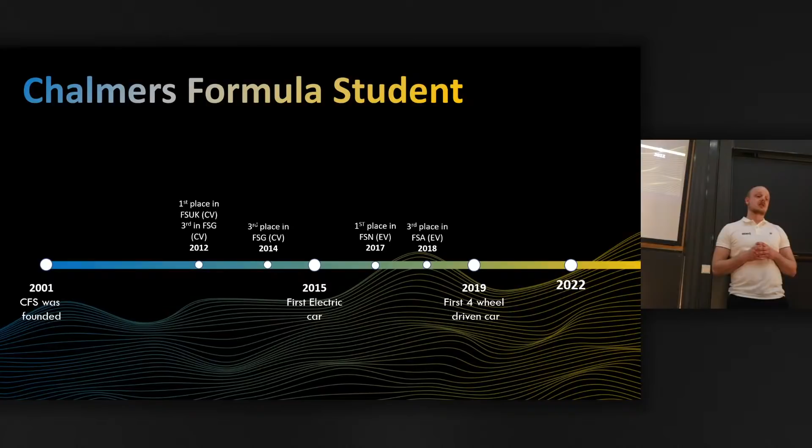So it all started back in 2001 when CFS was founded. And back then we were using a combustion car engine. So it was two-wheel drive. And we had some good success with it in 2012 and 2014. And eventually we went with electric. We started off with a two-wheel drive car there as well. And we had some great results there as well. And eventually in 2019, we went with a four-wheel drive system.

And then what's new this year for 2022 is that we're going driverless. So this year we're gonna have a car that can drive both with a driver in it, but it's also gonna be able to drive driverless. And with this comes a number of new technical challenges, and that's what we're gonna dive deeper into later on.

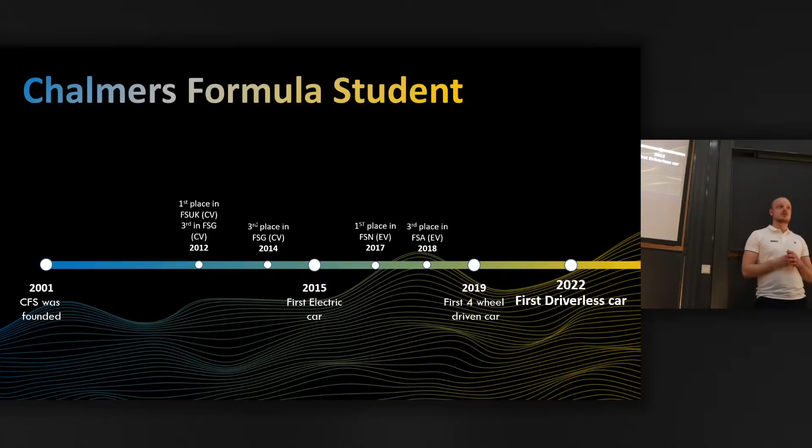So who is building this car? It's us, Chalmers Formula Student. We're a team of 43 project engineers that do this full time. We have 19 trainees helping out, and we have about 8 managers making sure we're doing what we should. And we come from a lot of different areas of study, over 15 to be specific. And we are a very international team. We have over 10 different nationalities in the entire team.

And I'm very happy to announce that we will go to 2 different competitions this summer. Formula Student Austria, where we're going to be driving a manual car. And we're going to be driving at the famous F1 Red Bull Ring track. And then we're also going to Formula Student East, which is in Hungary, where we're going to be running the car 100% driverless.

And then, as I mentioned earlier, for the Complete Engineering Challenge, these are the events we're going to be competing in. So first, for the static event, I told you we have to sell the car. So we have to pitch a business plan idea for a few referees or judges, where we have to show that we can pitch a good idea and sell it.

We also have the cost and manufacturing event, and this shows that the team is good at making up the budget and economy of the car. We have to show that every piece of the car is written down, and every process that goes into making the car is also written down. You can't build a car if you don't have the economy for it. So we have to show that we are able to do that.

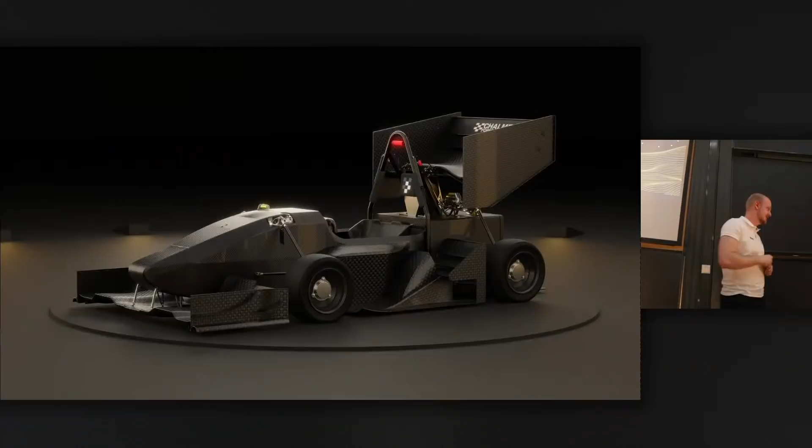And to start off, we're going to start off big by showing the 22 car. Some technical highlights of the car include 97% of what you see here is designed by us and manufactured by us. In each wheel assembly here, you can see there sits one outboard motor giving us 4-wheel drive, and all of these are hand wound.

And apart from milling of the molds, the entire monocoque is a long process that basically we make it ourselves, just like everything else. Here in the rear compartment, you can find the battery and the electric powertrain. And outside here, you can also see the aerodynamic package. Every part of this car is optimized to reduce weight and inertia, allowing us to accelerate and turn quicker and eventually reduce our lap times.

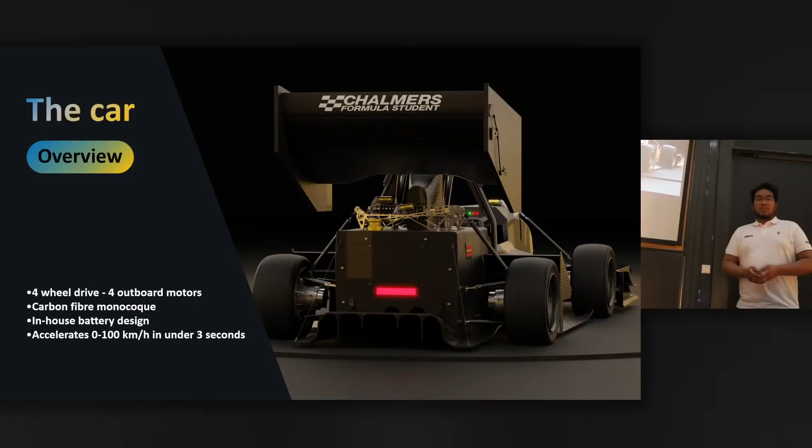As for our acceleration, from 0 to 100 we can achieve that in 2.5 seconds. To dive deeper into the specific subsystems, we will begin with aerodynamics, where I will hand over to Linnéus. Thank you, Jacob. Yeah, let's talk aerodynamics. Why do you need aerodynamics? Well, aerodynamics gives you downforce, and downforce gives you increased grip, and increased grip gives you more cornering speed, and that reduces lap time, and you get more points on competition.

So, this year's aerodynamics package was an uphill battle, because we had to add a lot of new components to compensate for the driverless system. So we added an additional computer, a LiDAR, and a camera, and a lot of other stuff. So we started off with a really low downforce level, but we're really proud to say that we increased that level from the start of the design period by 22% to the end of the design period.

And we did that by changing our parts, of course, but also taking into account the new parts and giving them casings for like the driverless computer or the LiDAR. And that gives us an aerodynamic package that makes it so the car can be driven upside down, theoretically, at 120 kilometers an hour. We will not perform this stunt, but that's just a fun fact.

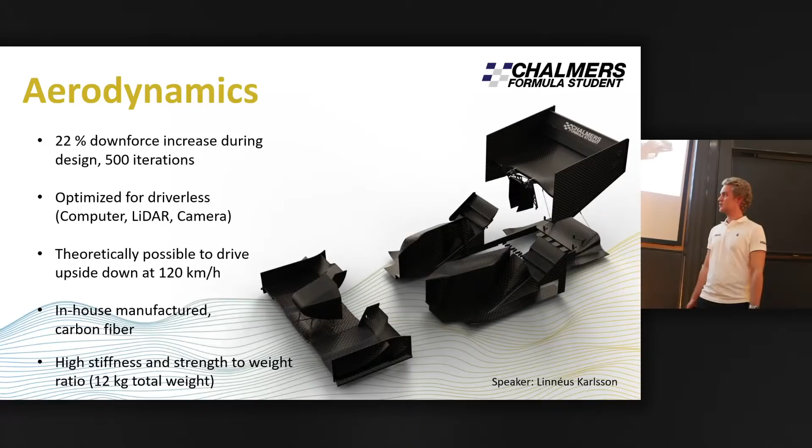And lastly, the aero package will be manufactured with carbon fiber, and this is because carbon fiber gives you a high stiffness and strength to weight ratio. So our aero package will be very light at approximately 12 kilograms. Yeah, and Daniel will take you through more on the parts.

Yes, let's talk more about the specific components of the package. First off, we have the front wing. This is the single largest contributor of downforce on the car at about 35%. We're very proud this year to have improved the braking performance of the aerodynamic package, that is the downforce produced, by 25% compared to previous years. The front wing is mounted to the monocoque using the brackets you can see here. These are topology optimized to reduce the weight, but still keep all the strength.

New for this year is that we have a drag reduction system on the front wing. This means that the flaps on the front wing can open up on the straights to reduce the drag and therefore increase the speed and efficiency. We also have a rear wing. This is optimized for the maximum downforce at around 25% of the total produced. This wing also has topology optimized brackets and a very strong DRS system that reduces the total drag of the car by 40%.

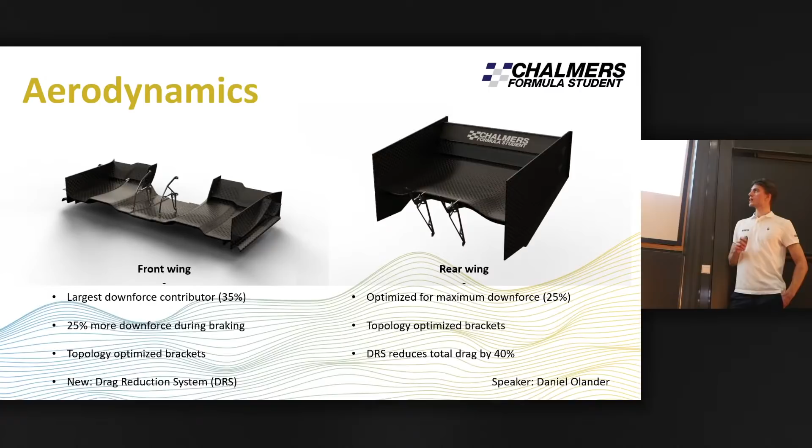On the sides of the car, we have the side structures. These are mounted on the side of the cockpit, beside the driver. This is a component that has been producing more and more downforce each year, and it's now up to 25% of the total.

New for this year is that we have an integrated cooling package, which means that the fans and radiators are mounted so that suction is increased underneath the car, producing more downforce, and also the fans are mounted in a way such that airflow is directed to the rear wing, increasing the downforce of the rear wing even more. We also have side covers that house the driverless computer on the side of the car. Lastly, we also have the rear diffuser.

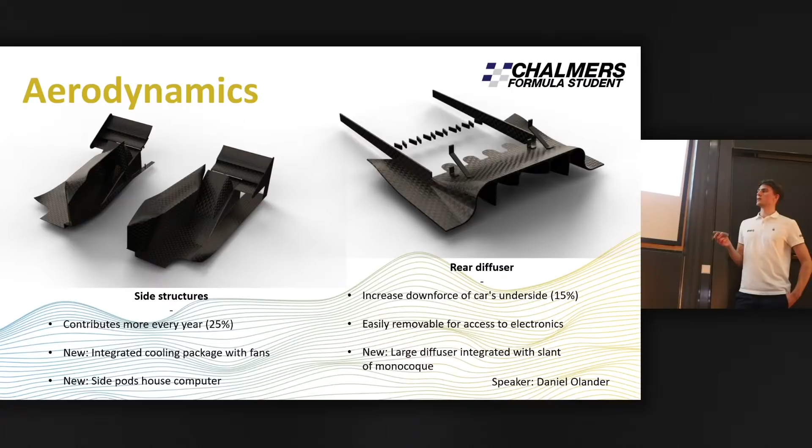The rear diffuser increases the downforce of the car's underside, the whole chassis of the car, and increases around 15% of total downforce. This is designed to be easily removable, to give easy access to the electronics in the rear of the car. New for this year is that it's larger than ever before, due to it being integrated with the monocoque that has a slant at the rear. Gabriel will now talk more about this monocoque.

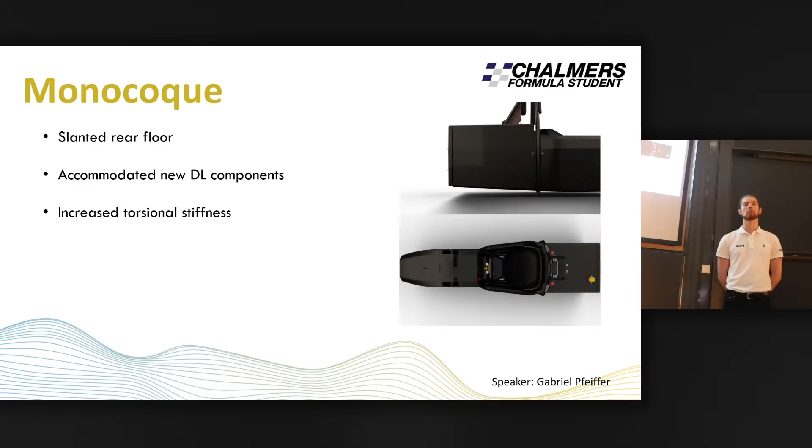Another important part for the chassis group is to do a lot of material testing. Since we are putting a driver in this that is going to be racing at high speeds around tracks, we need to make sure that the car is safe in case of a collision. For this, we do a lot of material tests, both for layups and in the case of crashes. We also want to optimize this so that the chassis weighs as little as possible while still keeping the driver safe. Now to present more about the moving parts of the vehicle, Herman is going to take over.

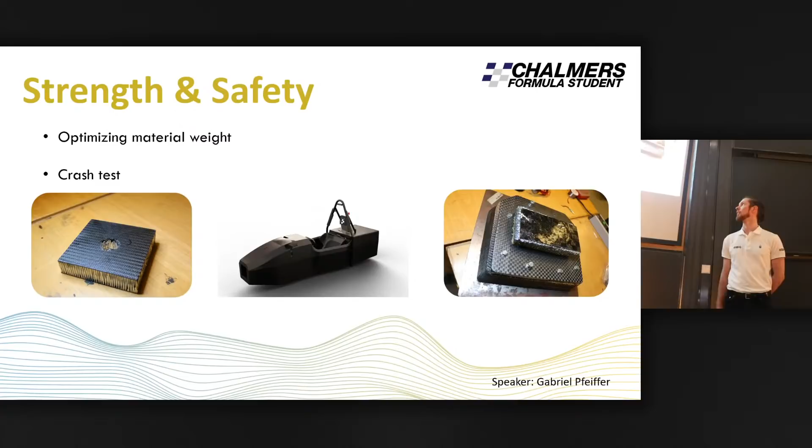Yeah, so I represent the wheel assembly group, and our mission is to get the power from the motor to the ground. To do this, we have this wheel assembly here. The biggest change this year was the fact that we moved from an 18-inch tire to a 16-inch tire. This was mostly done to reduce the rotating weight as well as inertia of the whole assembly. Together with other weight reduction things we did, we managed to reduce the mass of the system by 4.8 kilograms, as well as reduce the rotational mass by over 800 grams per wheel. This is of course very important to improve the handling of the car, as well as the responsiveness during acceleration.

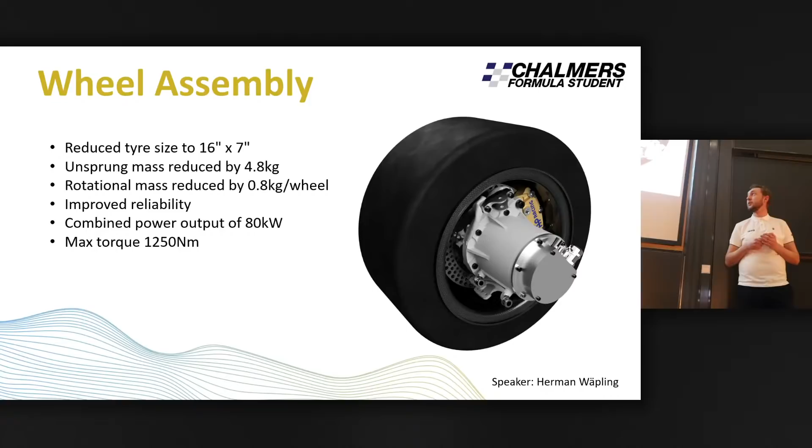Other than that, we try to make the system more reliable by reducing the amount of parts, and we also tried to get common parts so we could have interchangeable spares for the front and rear axle. As Andreas mentioned in the beginning, we have a four-wheel drive system on the car. So we are not only using motors to propel the car forward, we can also use the motors as generators during braking to recoup some of the power that would otherwise be lost into heat during braking. The maximum combined power of our tractive system is 80 kilowatts, and that is due to regulations. And our system produces a maximum torque of 1250 Newton meters.

To dive a bit deeper into the system itself, we have our homemade carbon fiber rims. One of the biggest reasons to use carbon fiber rims is of course to save weight. But we are also very free in the whole packaging design when we do them in-house, because we can change the offset and the bolt pattern of the rims very easily, thereby making a more well packaged system. Then we have our gearboxes. They are here, and they are single speed reduction gearboxes. It takes the approximately 20,000 RPM maximum from the electric motor and transforms it down to a more usable rev range, increasing the torque as well.

We have the floating disc brake assembly, which of course is used to stop the vehicle. We have 4 piston brake calipers in front and 2 pistons in the rear. The reason for using floating discs is of course that they won't warp when they get hot. Then we have our uprights. They are used to connect the suspension linkages to the assembly. They are designed by utilizing topology optimization to try to get as stiff and lightweight a component as possible. They are 3D printed using metal 3D printers, so they are printed in aluminium.

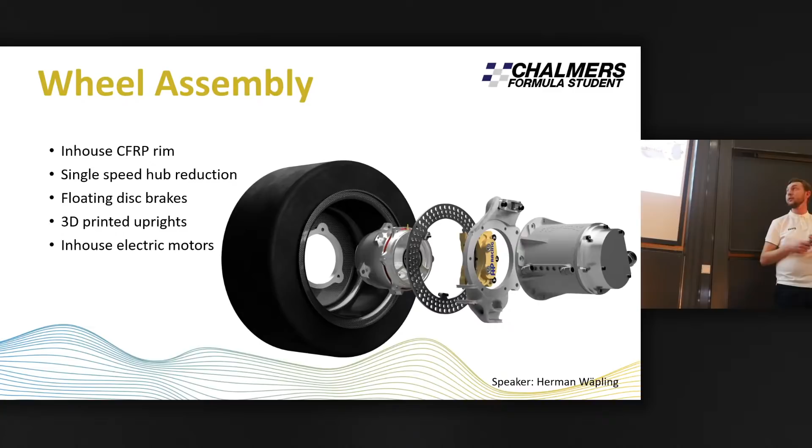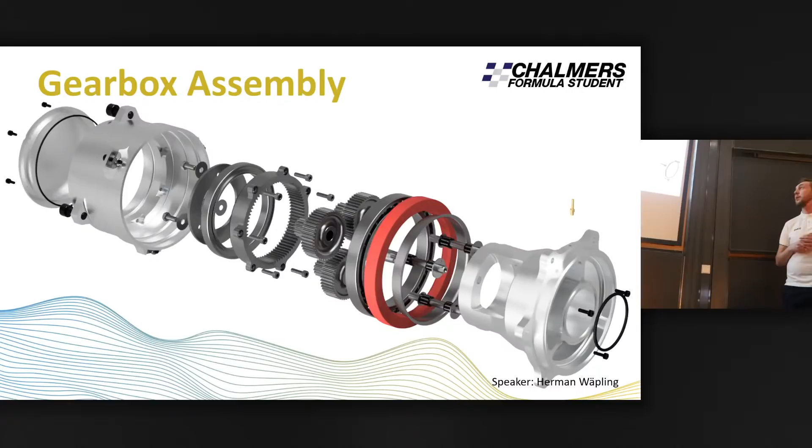Lastly, we will look a bit into the gearbox itself. It's a planetary gearbox. It's a 1.5 stage gearbox, so it takes the power from the motor in here. Then we have the planetary gear set, and then the ring gear. The ring gear is mounted to the gearbox housing, which then spins the wheel itself, so it's bolted here. It also holds the disc brake in place. And that's basically our system.

So now Suyash will talk a bit more about the suspension system. So we as a suspension group are responsible for all the vehicle dynamics of the car, the actuation system, and the kinematic linkages. And the basis of the vehicle dynamics is the suspension subsystem on the car. As we know, suspension is responsible for isolating the body from the road inputs and reacting to the forces generated at the tire contact patch. And that's where the actuation system will come into the picture.

So this year we have a very specific system on our car named HeRo Suspension, where HeRo stands for heave and roll. The important feature of this system is it is decoupled. Now what do I mean by decoupled? On production cars, we have one spring and one damper on each wheel, and an anti-roll bar is used to stiffen it up. But for us, the heave motion and the roll motion are basically divided into different springs and dampers.

This is all good, but it presents some challenges. This is a very neat and special design, but the challenge with it is setting it up and tuning it so that it becomes a competitive solution for us. But the advantages of using this system outweigh the challenges. The key advantage of using this system is the ability to tune the car with a stiffer spring in the heave motion and softer in the roll motion, along with independent damping coefficients, so that we can improve the tire grip during cornering and hence the handling of the car.

The biggest update this year in the actuation system is the dampers. We are moving towards shorter dampers. What this allows us is to make the system more compact, and hence we can reduce some weight in it, which is one of the goals for CFS22. Another specific part that we have focused more on is rocker bars, which transmit the load from the tire and pushrod to the springs and dampers. And this part requires additive manufacturing. Basically, they are going to be manufactured in 3D printable aluminum alloy.

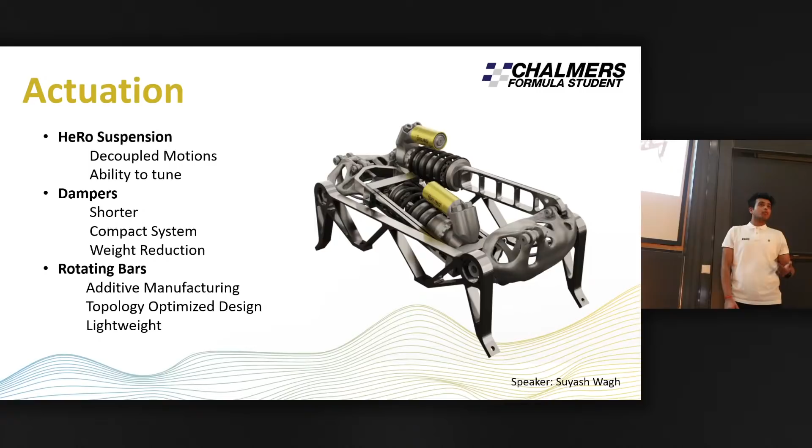Another crucial system in suspension design is to achieve the all-important ride and handling balance. Vehicle dynamics is used in conjunction with the kinematics to study the behavior of the vehicle during different dynamic conditions. As Herman mentioned, we are moving to 16-inch tires from 18-inch. So to compensate for that change, considering the packaging constraints and the targets set by us for different dynamic parameters, we have to change our mounting points on the chassis, keeping the same ground clearance and the same ride height. So basically we simulated how the linkages will travel during different dynamic conditions, and that way we came up with how we are going to mount these linkages on the chassis so that we get better handling of the car, which is important for every vehicle.

Our focus from now on is to build the compliance model. The basic idea here is to study the deflection of the suspension parts per unit force applied. Currently we are only using rigid components while doing the simulation, but as we move forward, we are going to consider elastic components such as suspension bushings, so that our model can become more accurate.

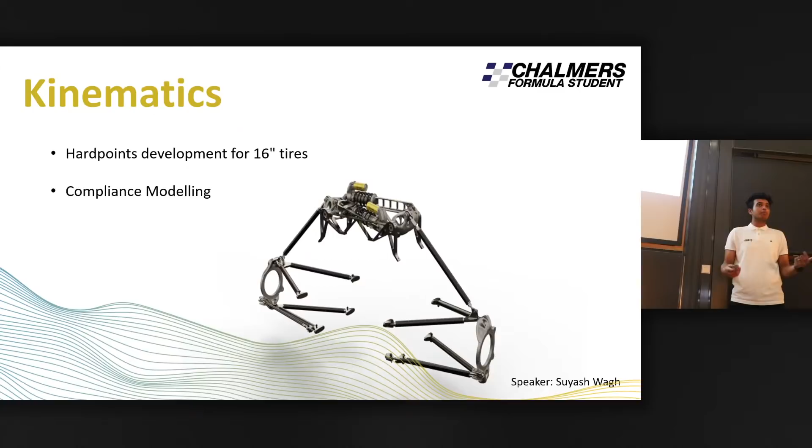We get more realistic data to validate our design. At last, I would like to show you some of the simulation videos that we actually perform. So this is one of the different simulations that we perform to actually check the behavior of the car during different dynamic conditions. So as you can see, both tires are moving in the same direction, so we call it parallel wheel travel, and here they are moving opposite, so we call it opposite wheel travel.

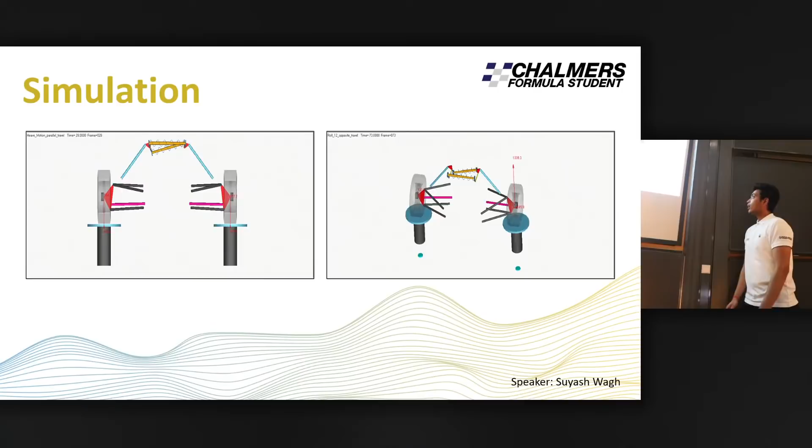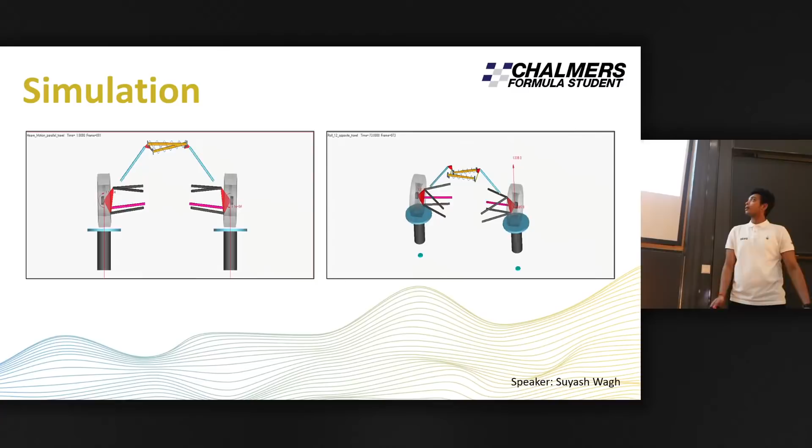And this type of simulation is used to check the behavior of the car whenever there is a bump or a droop on the road. And like this, we perform different simulations to check the behavior of the car in different dynamic conditions. To talk more about braking and steering, I will hand over to Maja.

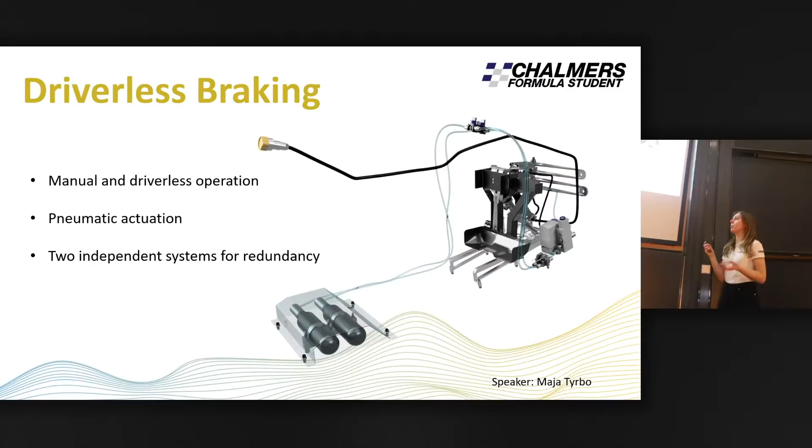And then we go down to pneumatic pistons here. If we look closer at the pneumatic pistons, we can see that they are directly connected to the brake pedal. So when the cylinder gets air, it pulls the pedal in the exact same way as if the driver were to push the pedal. So the system is basically acting as a driver.

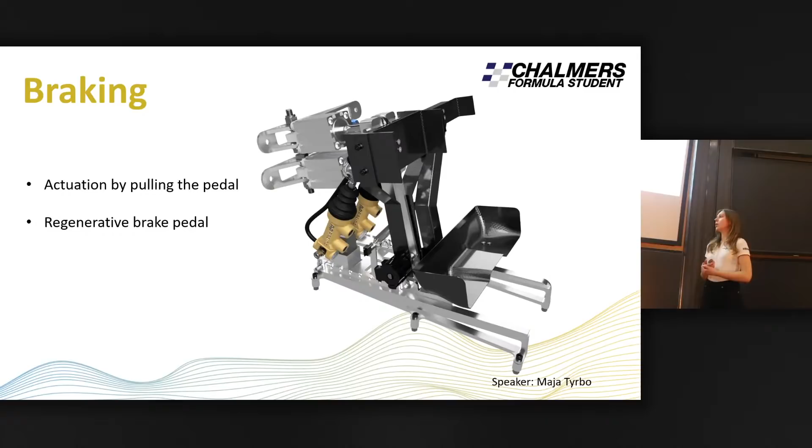And then for manual braking, we have also added a brake pedal for regenerative braking that Herman told you about. This pedal is situated here outside of the normal brake pedal, which is the aluminum part in the middle. With this it is possible to measure the travel of the driver's foot, so we know when to apply the regenerative braking, and in that way we can use less energy while still going the same distance, which means we can downsize the battery and score more points in endurance competitions.

And then for steering, it's the same as with the brake system. We need to do it both manually and driverless. So we have a normal steering wheel like other cars. And then for the driverless part, we have a servo steering motor situated here. The motor is directly connected to the steering rack, so when the motor spins, the steering rack will move back and forth, which will steer the wheels that are situated here.

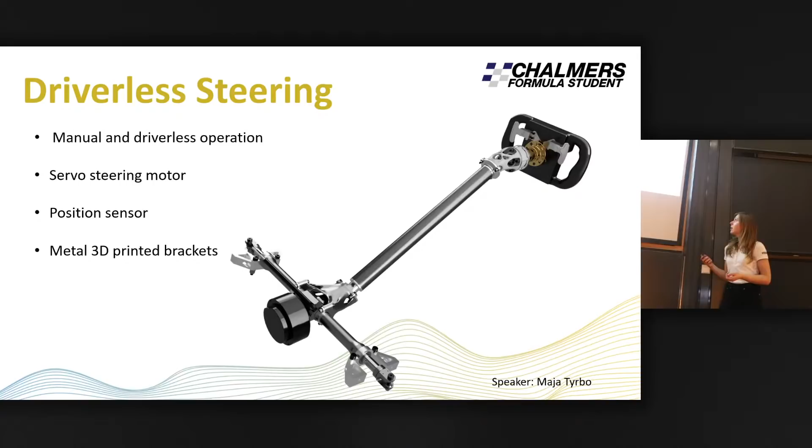We're using a position sensor, so we know the angle of the wheels, so that we always know when to steer and how much to steer, depending on where we are on the track. And then to hold it together, we are using these metal 3D printed brackets where we use the topology optimization that both Suyash and Herman have told you about. So with that, I will hand over to the powertrain and Vishal.

As discussed earlier, we have a lot of additional components due to the driverless integration. We have spent considerable effort in packaging the components inside the monocoque. The considerations were made with several factors, but a few of them are bringing the total weight distribution as central and as low as possible. The battery box is the heaviest component in the car. This year, the accumulator enclosure has been made lighter by incorporating more lightweight aramid material in the design.

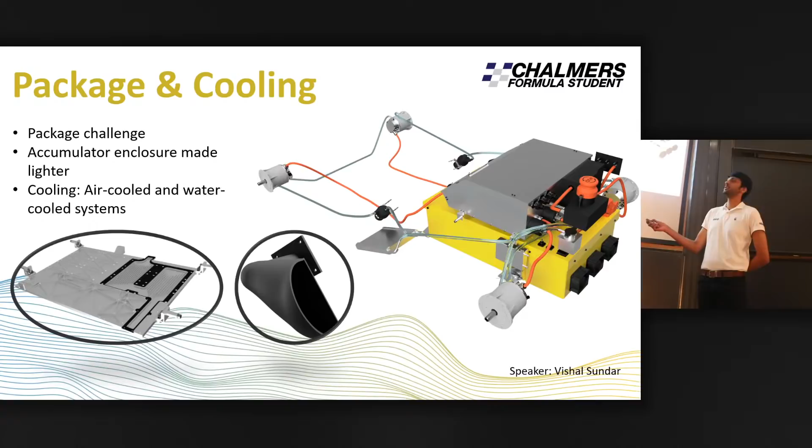The cooling of the powertrain unit is done by two systems, the air-cooled and the water-cooled system. The motors and the PE box are water-cooled, while the accumulator box is air-cooled. Some key designs to note here are the cooling plate for the PE box, which is 3D printed to make the intricate cooling channels, and the air intake manifold. We have accommodations for actuators this year, that's braking and steering actuation, control and implementation.

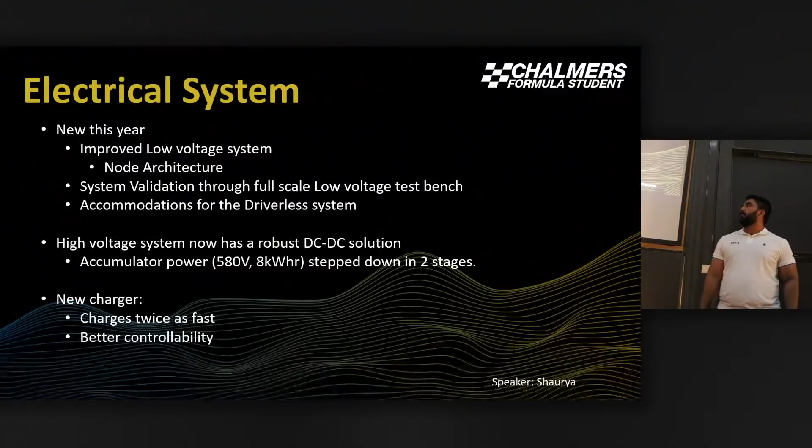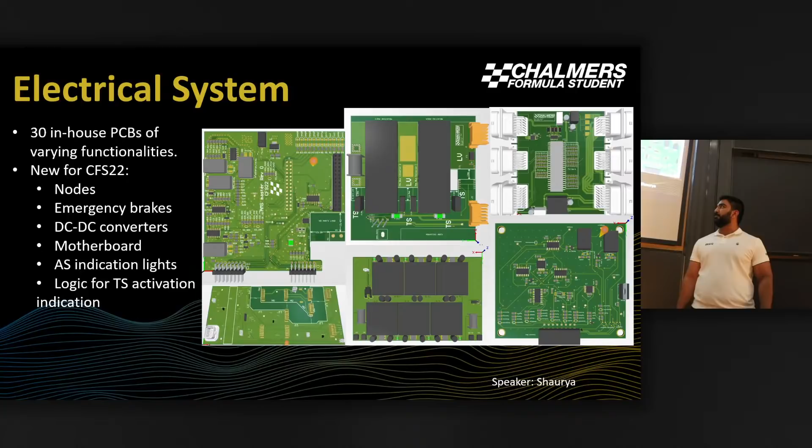For high voltage, we have a robust DC-DC solution. It is divided into two stages. It also has soft start on input and output. It comes with temperature and current sensors and also has double the power output from the previous year. We also have a new charger this year that charges twice as fast and has better controllability. We have 30 in-house PCBs running from rear to the front end, covering everything and making everything happen. For this year, we have nodes, brakes, DC-DC converters, motherboard, indication lights for logic and autonomous system. I'll hand over to Jonas for nodes.

So the node system, the communication system, it's a bit difficult to visualize, but you can think of it essentially as the nervous system of the car, which means that it needs to be very quick and it needs to be 100% reliable. Sending the wrong signal at the wrong time could essentially mean the difference between the car taking the turn optimally or spinning off the track. And this has to be done for over 100 different sensors, and those sensors have to be available to all devices on the car. So it's quite a difficult situation, and we have to solve that somehow.

The way we've done it this year is that we have 6 different nodes, as you can see here, and they're all communicating over a CAN network, which means that the node that wants the information can take the information and ignore the rest. And if this node wants to communicate with this node, for example, we can directly send the message to that node, and we avoid the chain that could otherwise happen that would cause delays.

What's good this year is that we have already managed to set up telemetry for this, which means that while we're testing in the testing season, we can see what's going on inside the car, even if it's driverless, and analyze the data, try to optimize the parameters, and make data-driven decisions to make sure that the car improves as fast as possible so it's ready for competition season as best as it can be.

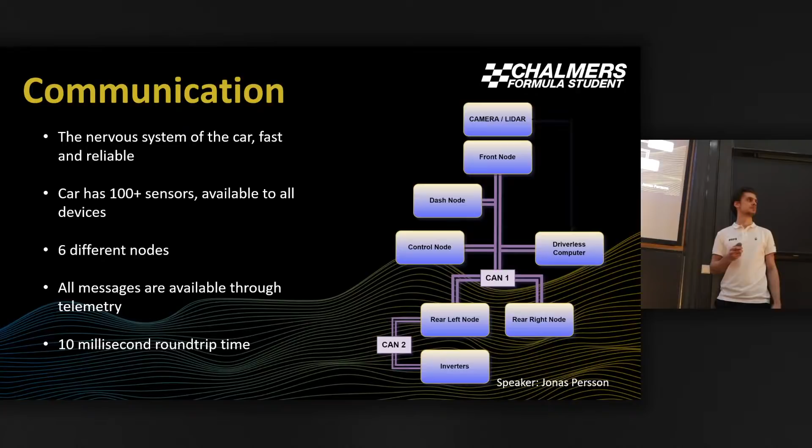And as I said before, this is all very fast. We can essentially read the accelerator pedal from the front node, send it down to the control node where we convert it to the optimal torque we want, send it back down to the rear left node and out to the motors, and we can do that in under 10 milliseconds. And the magic that happens here in the control node is something that Andreas will be talking more about.

As Jonas mentioned, with the help of all of these 100 plus sensors we're using, we're able to make sure that the car is behaving in just the way we want. And then you might ask yourself, how do we want the car to behave? Well, we have 4 tires. They're the only contact patch with the ground. We want to maximize the grip that these tires have. So by using different control systems running in the background while we are driving, we are able to optimize and get the fastest possible lap time.

An example of this is traction control. Most people have it in their ordinary car. We're using the same, might be a bit faster, might be a bit more advanced, but we're using it. What's new is we're using a yaw rate controller, which basically listens to the driver. It sees how much he wants to turn. It notices how much the driver wants to rotate the car.

And as we have mentioned before, we have 4 motors, 1 in each and every wheel, and these are not linked together, so we can choose how much torque and speed we want on each and every wheel. By doing this, we can estimate how much the driver wants to rotate the car, and we're able to send, for example, more power to the outside wheel and less to the inside wheel, and then we can make a sharper turn, so we get a way sharper turning radius.

And how do we do this? So, from all the sensors Jonas talked about, we get all the inputs from the CAN. And what we do with this, we send all of the sensor data and all the driver requests into an estimation block. And what we do here is, with the help of Kalman filter and more, we're able to estimate the speed of the car, but we're also able to estimate how much does the driver want the car to rotate.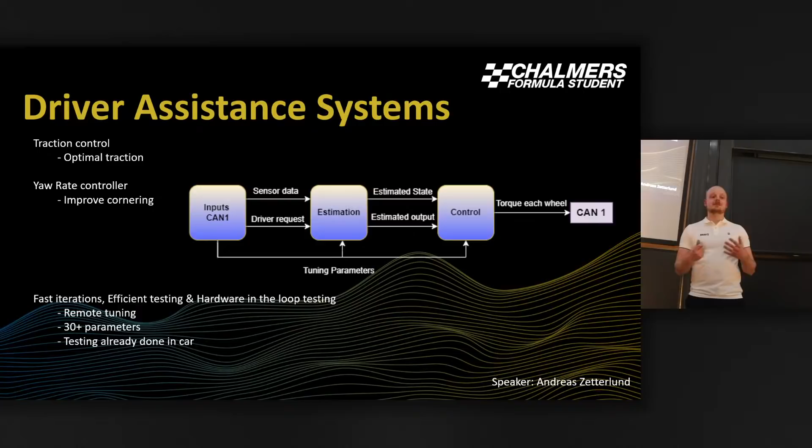And we also wanted to make sure that all of these solutions are very robust and they actually work. So already back in October last year, we implemented all this as much as we could into last year's car and made sure that it actually works on the physical hardware. And this works great if you have a driver, but what happens if you don't? That is what Bernardo and Kilian are going to talk about. The driverless system.

Yeah, so as a first-year driverless team, we focused a lot on robustness. We wanted to make a first base code that works well, is robust, and that next years they can improve on. So we made sure we have comprehensible code and documentation. That is our main goal. For this, we also decided to go for ROS 2, because of the great improvements they made over ROS 1 in terms of performance. More interestingly, we decided to use ROS 2 inside Docker containers.

How we do it is we have multiple ROS nodes, each of them with different algorithms, and each of them runs inside a Docker container. This way, we can develop on our own computer, in our Docker container, and it will run exactly the same on our computer or on the driverless computer. We also have it integrated into our GitLab CI. So every time we make new code, it automatically compiles everything, creates Docker containers, and deploys it, so we can use it in the car. This makes it possible to change Docker containers inside the car in seconds. We don't need to shut down the car or the systems. We just shut down one Docker node and put in a new one. We also decided to use C++ due to its performance and great usability with ROS 2.

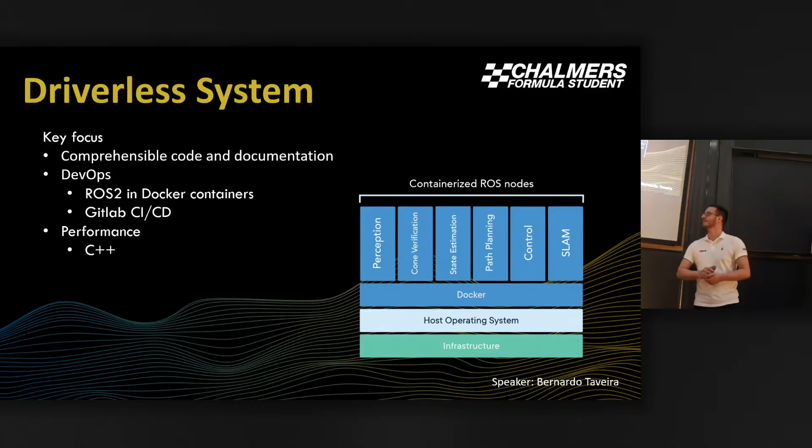As for hardware, we mainly focus on LiDAR, but we also have a camera. So we have a LiDAR, a camera, and an IMU plus GPS. Because we mainly focus on LiDAR, we don't need a heavy GPU or heavy processing unit. So instead, we only use one CPU, which is an Intel i9, with 32 gigabytes of RAM, and a Coral Edge TPU to help us run small classification neural networks.

And this is our pipeline. So we start, again, our main sensor is the LiDAR. So we start first with the LiDAR point cloud, and we use perception algorithms to try to find objects. After that, we have objects that could be cones or could be something else. So we run it to cone verification. And this cone verification will try to verify if it's a cone or something else.

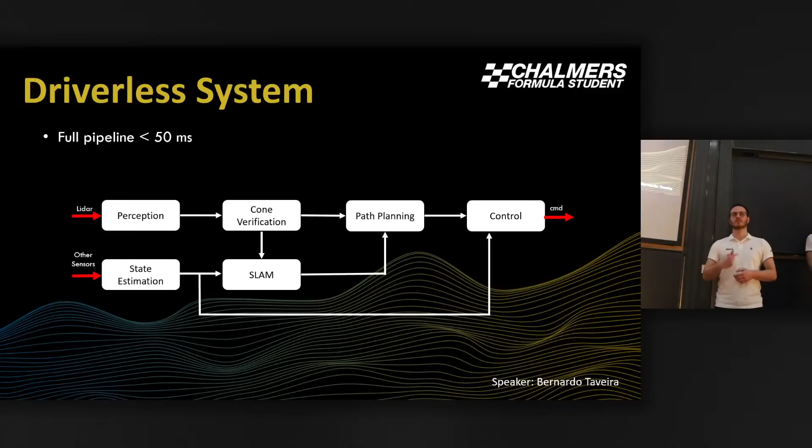From this, we obtain cones, and we do path planning, which decides where the car wants to go. After this, we have a control system that controls the car, the steering and the pedals, to achieve that path. We also have state estimation, which estimates the position of the car and the velocity. And we have SLAM. SLAM is to map the track, so if we go multiple laps around the track, we know already the track, so we can go faster.

So for perception sensors, again, we focus mainly on LiDAR because it's a precise measurement of position, and it's very predictable. It doesn't change much with weather conditions or lighting conditions, unlike the camera. Also, it's very computationally light. We don't need a GPU. We can use only a CPU. That's enough for us. We also have a camera.

We use the camera mostly for validation. So we get what we think is a cone, and then we validate with the camera and decide which color the cone is with the camera. And that's crucial for us because we need to know where to stop. And those stopping locations are signaled by different color codes.

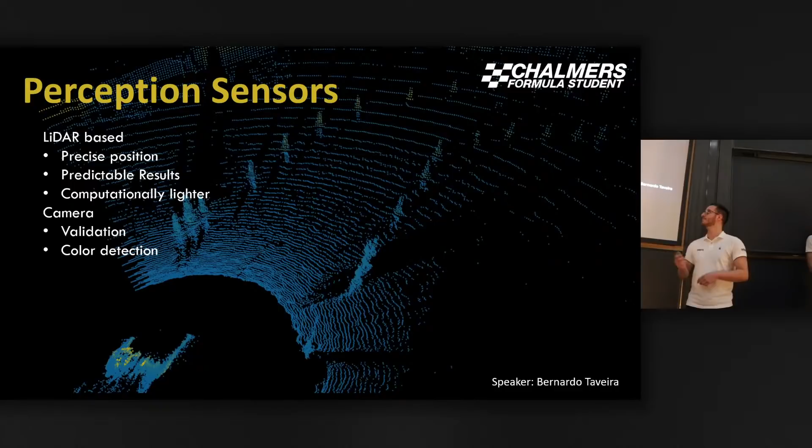For perception, we start with a big cloud of points, a massive cloud of points, which is very difficult to process. So we first do some filtering. We take out the points that are very far away and the points that are very close. After that, we try to detect the ground, as denoted here in gray. So we detect the ground and eliminate these points, and then it becomes a much lighter cloud.

After that, we try to find the clouds of points, as denoted in blue. So these clouds should represent an object. The problem is these clouds have some points that have been removed by the ground removal, such as the ones in yellow, because the ground removal is quite harsh in terms of removing points. So we then recover the points in the reconstruction step, as denoted in yellow here. After this, we have full objects represented by clouds of points. So we then do cone validation with the camera and the LiDAR.

We are very proud to say that this entire process takes under 5 milliseconds. Also, we are able to detect cones up to 15 meters, which is really good for us. And we expect to increase this number to 20 by competition. Now for path planning, I'll pass it to Kilian.

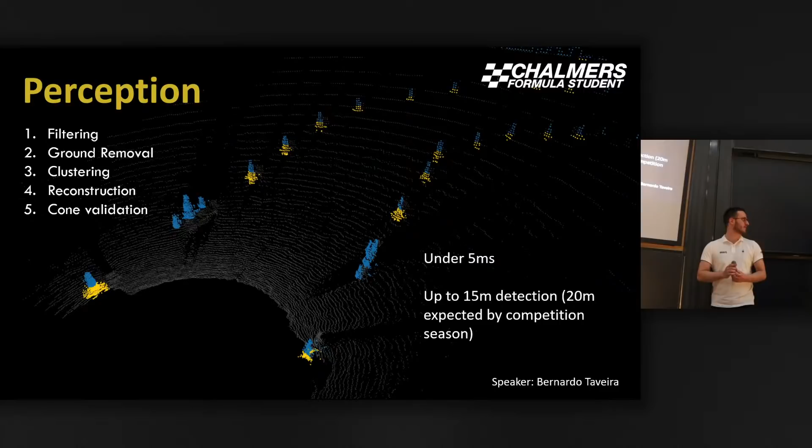Yes, exactly. So now we know the position of the cones, but we don't know yet where to go. So that is the next step, to plan a path. And for that, we exploit the geometry of a track. So we use Delaunay triangulation, and what it does is it connects all the points with triangles. And if we then take the middle points of those vertices and then fit paths through that, we have a lot of potential paths that could be our path that we want.

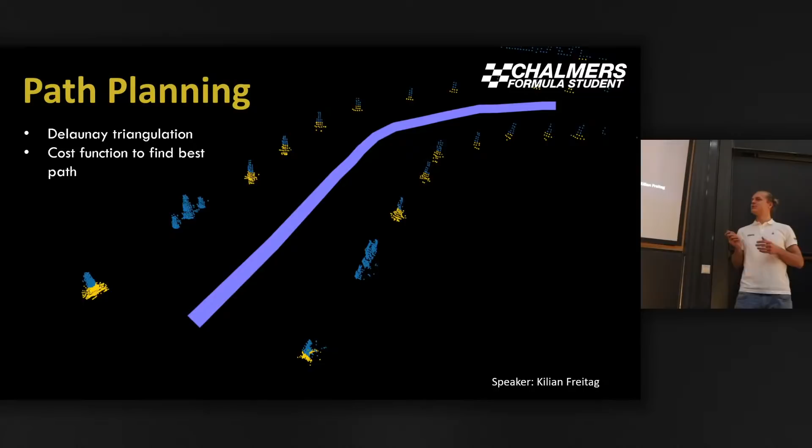And one of those is for sure also the middle track of the race path. And we only care about the middle track because the path is fairly slim. We don't have much room to go to the left or to the right, so that is sufficient. And then to choose which one is actually the best path, we have a cost function. And that cost function includes things like the angular change of the path or the standard deviation of the track width to then find the best path, which is here visualized in violet.

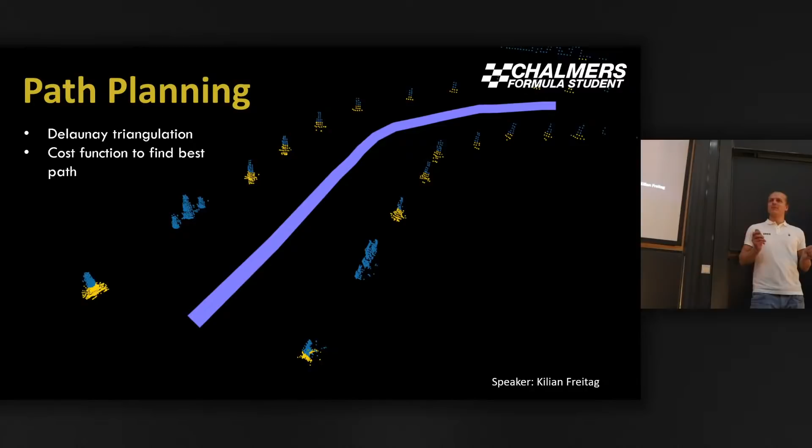We additionally have a model predictive control, which is a much more advanced control algorithm. And what model predictive control does, it has a model of the car and it looks into the future. It computes what will happen in the future, and depending on that decides which is the best optimal control choice for the current state. And all of that, as you can see, is with respect to the car.

So we can only plan as far ahead as we can perceive cones. If we cannot perceive cones anymore, we cannot plan ahead. And it's all in the local frame, exactly. So what we are doing to avoid that is to use SLAM, which is simultaneous localization and mapping.

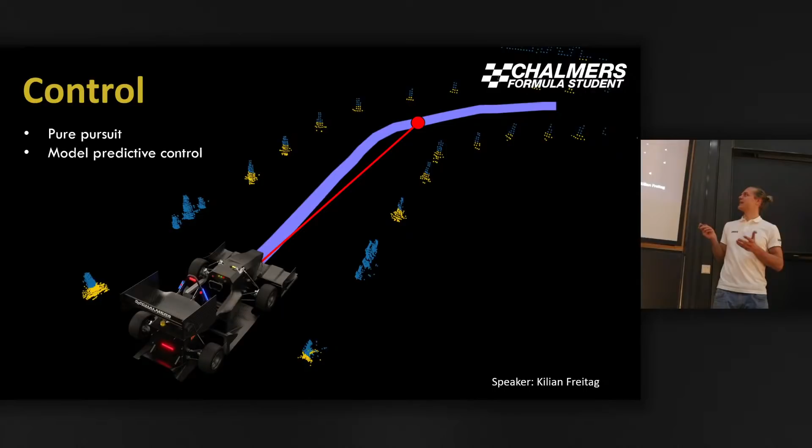In the first lap, it doesn't change anything, because we don't know yet how the track is. But during the first lap, we can actually map everything and save in a global map where the cones were detected. That means from the second lap on, we know how the track is. We can plan much further ahead than our perception pipeline can detect cones, which means we can go much faster and have many advantages, and it is also much more robust.

For that, we use FastSLAM 2.0, because in our opinion it is a good choice as it's less likely to diverge. And between two readings of the sensors, it's not known which cone is which in the next reading. So for that, we have to associate the data, which we do with the joint compatibility branch and bound algorithm. So how does it look in a simulation?

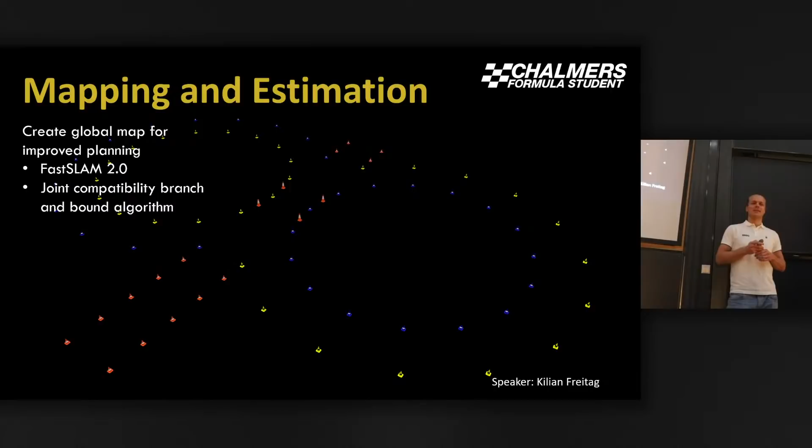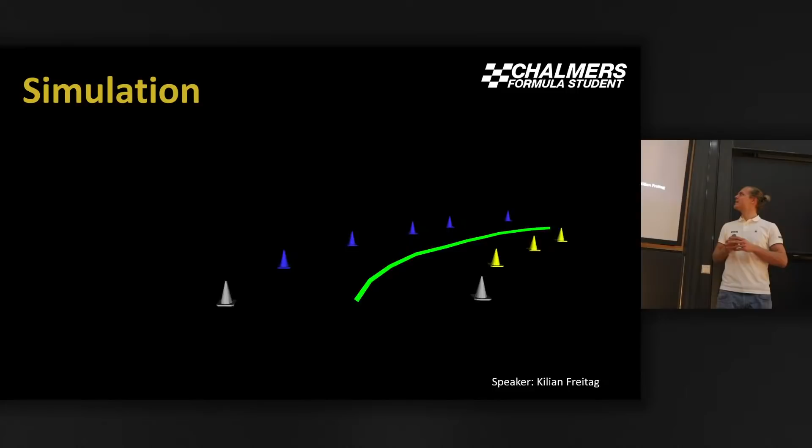Here's a video from the local frame, from the view of the driver. What you can see is always the cones that are perceived by the perception pipeline. And they are shaking because we are adding noise to the simulation to make it more realistic. The green path is the planned path, and the car then follows that path. It ran a lot of hours without crashing, so that is quite reliable. Exactly.

So, boiling everything down. We are a team from many different studies and fields. It's a great engineering challenge to make that possible. We have challenges in software, electronics, and mechanics, and we try to combine that all together to build a race car, a robot, one could say, to drive as fast as possible and make that all work together.

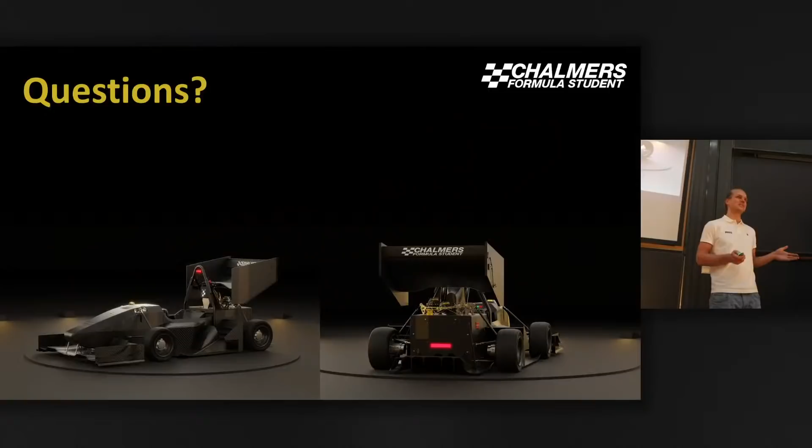Here again, the car, and we are now open to questions. And also, if you're online, please feel free to ask questions in the chat, and we will bring them up here, or obviously from the audience.

Question: top speed? Top speed. Well, I think we say 130 kilometers an hour. So it doesn't go too quick. The focus is more on the acceleration. What is the estimated weight, if you can say? Unfortunately, we don't want to reveal the weight, as that is quite a sensitive number, especially as it reveals at what speed the car can drive upside down.

Who will drive the car? Possibly me, but once we get to competition season, we look for drivers. It has to be a Chalmers student, and there are a lot of good drivers at Chalmers. So usually when we're getting closer to the season, we start recruiting. So we haven't decided yet.